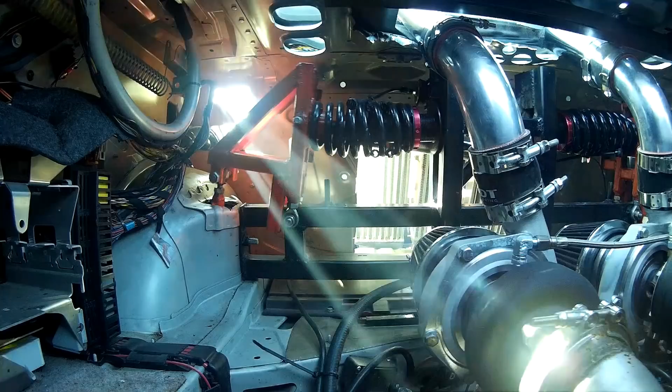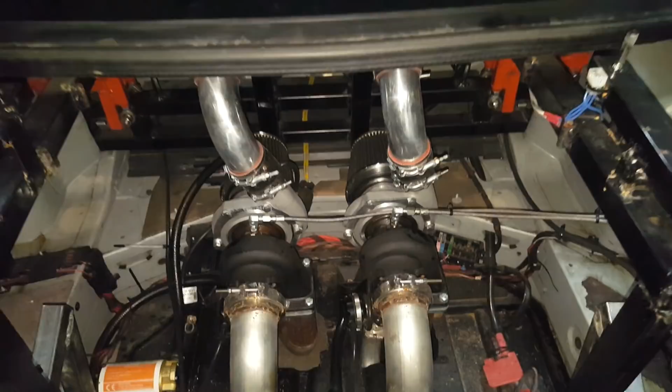This video is going to be about how I got the Twincharged system working on the 55. Unfortunately, I still couldn't get a hold of an engine tuner to actually tune the engine for me, but everything else is working, so I decided to upload this video for now because the next video might take a while. There was a bunch of electronics involved in how I got this working, and a lot of programming, so I'll show you guys how I did that.

And a few other things. I've added a carbon fiber roof. That's because I had to add a roof scoop on the back. The scoop still isn't done, but I've done some temporary ducting work for now, just to guide air to the intercoolers. This middle part comes off, so while I was testing it, I just took this middle part of the roof off, so there can be some air going to the intercoolers. And yeah, the intake air temperatures with this setup are super cold.

And I've also made a vent at the back. That vent is basically so that the air entering from the roof scoop going through to the intercoolers will exit from the back.

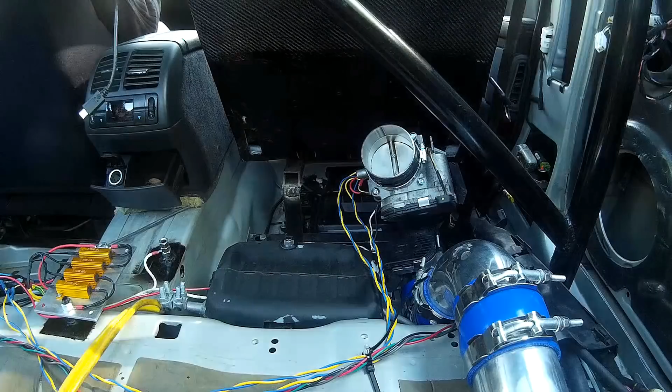So far I've only been running the system at low boost because it's not tuned to take more boost right now. But the reason I was testing it is just to get everything working before the dyno tune. So when the car gets tuned, it's just going to be a matter of increasing the boost, and then the car will actually be able to make more power.

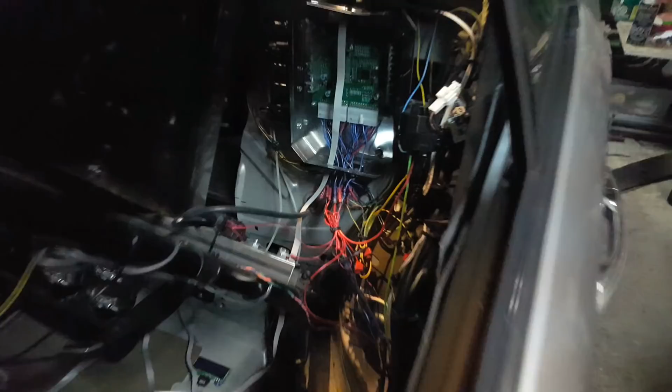So I'll start off by explaining how I got the Twincharged system working, the electronics and everything, and then later get on to all the other things.

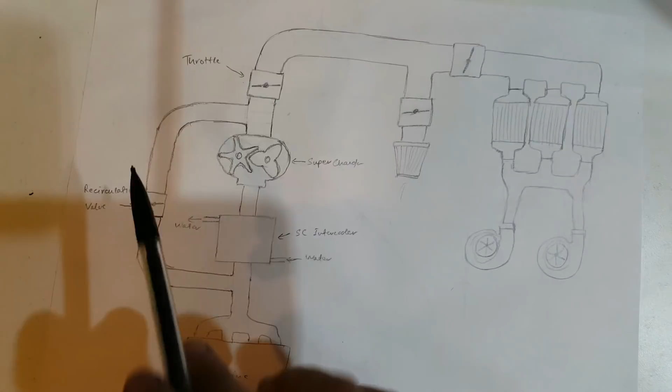Just to quickly explain how the Twincharged setup actually works, I've drawn a diagram of what my induction system looks like right now. These are the two throttle bodies that I have behind the passenger seat and an air filter over here. All this is in the engine compartment: the throttle body, the supercharger, the intercooler, water to air intercooler, the engine over here, and this is the surge tank, and a recirculating valve located right underneath the supercharger. And these are the turbos that are in the trunk and three intercoolers that the turbos feed into.

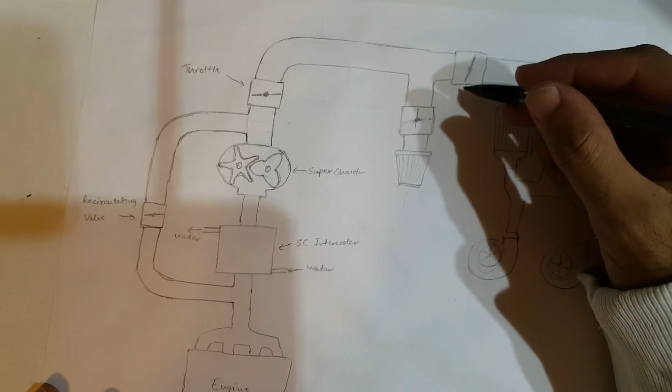So the way the system works right now is that when the car is in supercharged mode, this valve remains open, like this, and this valve remains closed. So the air comes in from this air filter, goes through this pipe, through the throttle body, through the supercharger. The supercharger also has a clutch, so when the clutch is on and the recirculating valve is closed, that's when the supercharger is on.

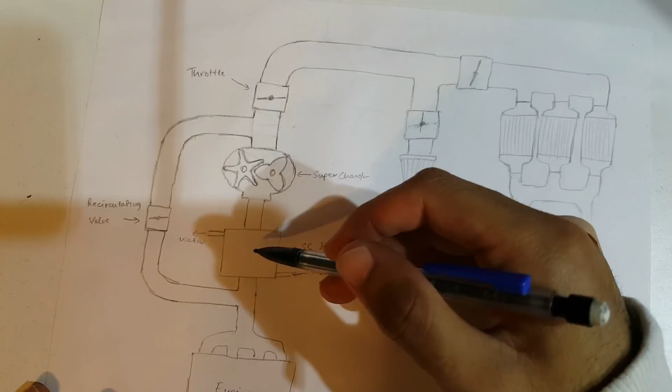So the air will basically go through the supercharger, through the screws, and it will be compressed. Then it goes through this intercooler, a water to air intercooler that cools the air down, and then it goes into the engine. What the supercharger helps do is, because it's compressing air and putting compressed air into the engine, that also means the engine will blow more exhaust, because if you're feeding more air into the engine and it's combusting that air, obviously you'll get more exhaust as well.

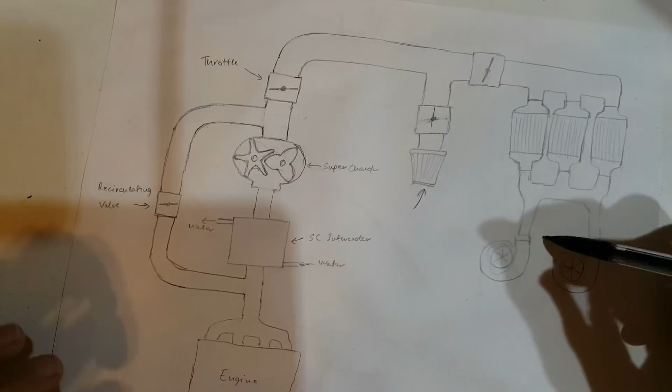So all that extra exhaust coming out of the engine helps spool the turbos up faster. When the turbos do spool up and reach their maximum pressure, right now you can see that this valve is closed, so the turbos are doing nothing at all. They're just compressing air in this section over here.

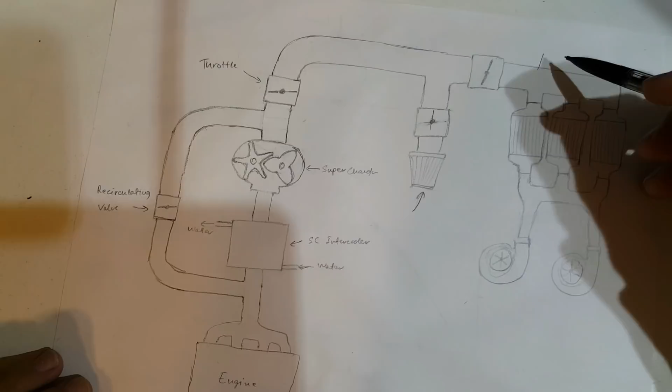And there's a pressure sensor that I have right here. What that pressure sensor does is, when it detects that the turbos are spooled up and they've reached the pressure I set it to, the system will know that the turbos are ready. What it will then do is open this recirculating valve.

And when this recirculating valve opens, that basically means all the pressure the supercharger is making will be lost. It will just go back into this section of the pipe over here. So basically the recirculating valve is like a bypass valve, but for the supercharger.

There's another pressure sensor that I have right at the surge tank, and when this pressure sensor detects that the pressure at the surge tank has fallen to zero, meaning the supercharger has disconnected, that's when it closes this valve and opens this valve. So then the extra pressure from the turbos would basically be boosting the engine rather than the supercharger.